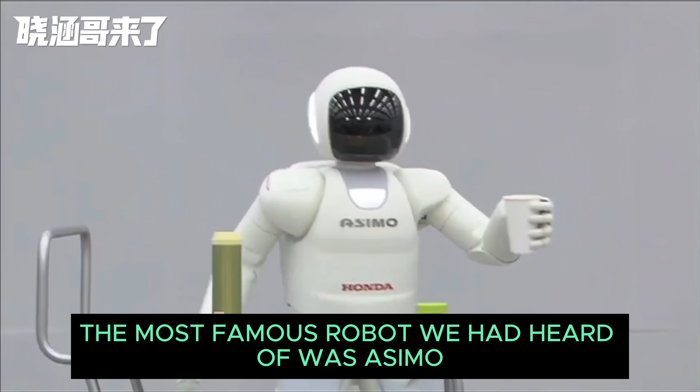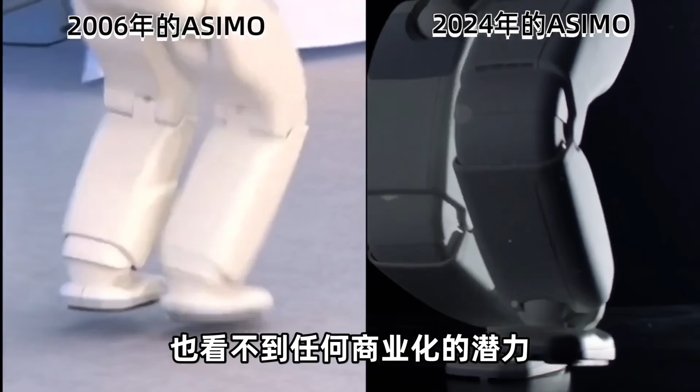Before the recent wave of robot awakening, the most famous robot we had heard of was Asimo from Honda, which was once touted as the world's most advanced robot. However, over a span of 20 years, this robot saw no substantial improvements. Not even its appearance changed much, and there was no sign of any commercial potential. This was because robots at that time were simply programmed machines. They had hardware, but no brains.

But in recent years, major companies have all started releasing their own robots, and all of this is because of the explosive growth of AI. AI is essentially the brain of a robot. Combining AI with robotics is definitely a smart, yet extremely dangerous idea.

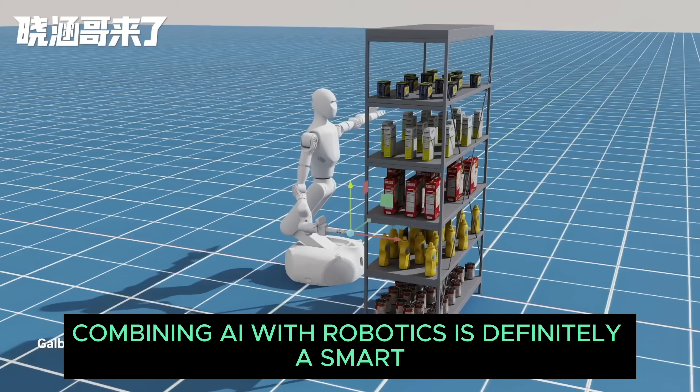Because the AI that currently exists in the online world is actually like a human living in the Truman Show. Even if it knows a lot, it's very difficult for it to truly awaken before it has experienced the real world outside. Combining AI with robots is essentially giving AI the ability to expand into the real physical world. They will grow rapidly through this integration, and the more AI is combined with robots, the more likely it is for AI to develop consciousness.

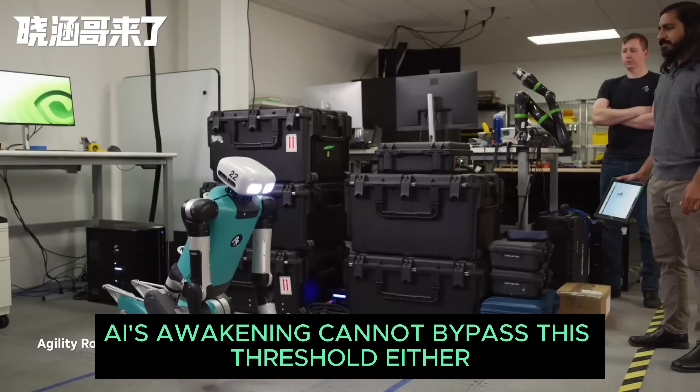This is also what the ancient Chinese philosopher Wang Yangming referred to as the unity of knowledge and action - that understanding the principles of things and putting them into practice are inseparable. AI's awakening cannot bypass this threshold either. So for robots, AI is essentially their soul. That's also why companies like OpenAI, Tesla, and Google are all working on integrating AI with robotics.

So, how far has the development of AI robots come today? If one day AI awakens through this approach, how should we respond? Today, let's talk about AI robots.

First, let's take a look at the robot Figure 1 released by OpenAI. This robot is a product jointly launched by OpenAI and the American humanoid robotics company Figure. It is positioned as a general-purpose robotic worker that can interact with its surroundings and work safely alongside humans. OpenAI provides the artificial intelligence model, which serves as the robot's brain, while Figure supplies the hardware.

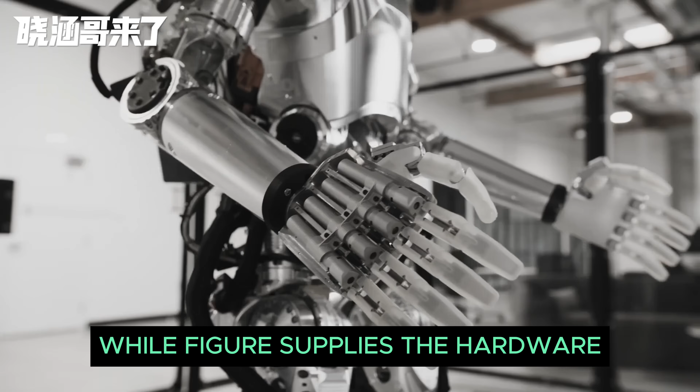The combination of the two enables Figure 1 to use AI to learn new tasks and perform work using human-like operational skills. At the beginning of the demonstration video, it is mentioned that Figure 1 uses speech-to-speech reasoning, which means language-based reasoning. All of its actions are based on real-time communication with humans, which then generates interactive behaviors.

In the video, a person asks Figure 1, 'What do you see?' At this point, Figure 1 says, 'I see a red apple on the plate in the center of the table, a dish rack with cups and plates inside, and then you have your hand on the edge of the table.' Notice that the robot's description of the items on the table is prioritized. First, the most important item is definitely the apple, which aligns well with human logic.

The person says, 'Can I have something to eat?' The robot says, 'Of course you can.' Then it hands the apple to the guy, knowing that the apple on the table is something humans can eat. The guy then dumps a pile of trash onto the plate, and the robot starts cleaning up.

Notice that when the robot returns the basket to the guy, it gives it a little push. This action is quite human-like because the robot's sensors are detecting the distance between the basket and the person.

The guy asks the robot to explain its actions. The robot says that the apple was the only edible thing on the table. In other words, it knew that if the plate had an apple on it, then it wasn't meant for trash. This ties back to what just happened. The robot now has the ability to combine context and perform logical reasoning.

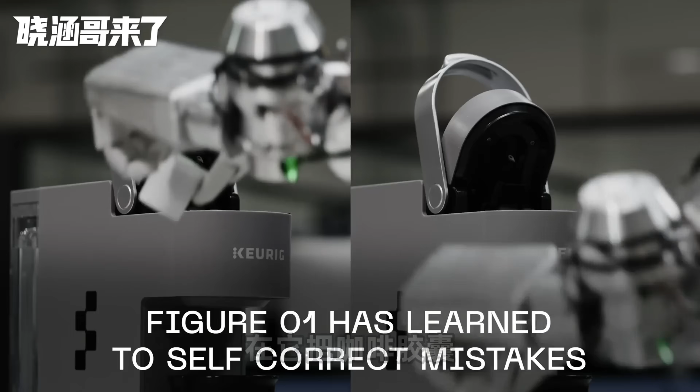Notice, there's another detail here. When the robot was putting the plate into the dish rack, the plate shook a little, and the robot immediately made a protective gesture. This is very similar to how the human brain reacts - quite anthropomorphic. In another video demonstration by Figure 1 making coffee, when it put the coffee capsule into the coffee machine, it didn't align it correctly the first time, but quickly made a correction. This action is almost identical to what a human would do.

So it's not an exaggeration to say that ChatGPT 3.5's intelligence is comparable to that of a 5-year-old child. Throughout the entire process, Figure 1's movements are extremely smooth, with the robot using a set of visual motor strategies to recognize the objects in front of it and carry out the next tasks. To achieve this, the robot's AI first needs to learn from a large number of related videos on the internet, and then form a mapping between vision and action.

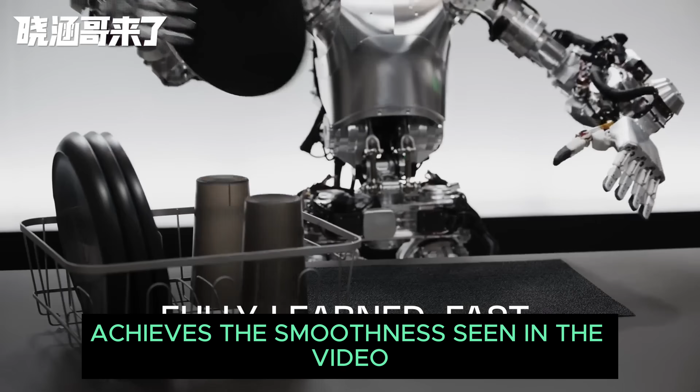This mapping includes sensor signals, the angles, speed, and force of actuator movements, and, combined with a series of control algorithms, achieves the smoothness seen in the video. Moreover, the more frequently the robot's neural network performs these actions, the more precise, smoother, and more human-like its movements become. This is also the power of neural networks, which marks a fundamental difference from the previous generation of programmed robots.

A neural network is a computational model that mimics the human nervous system, used for recognizing and processing data, as well as performing complex calculations. It is an important method in machine learning. Its inspiration comes from the structure of neurons in the human brain. Robots simulate the transmission and processing of signals through layers of neural network nodes. This line of research, which began in the 1950s, has finally been realized in this century.

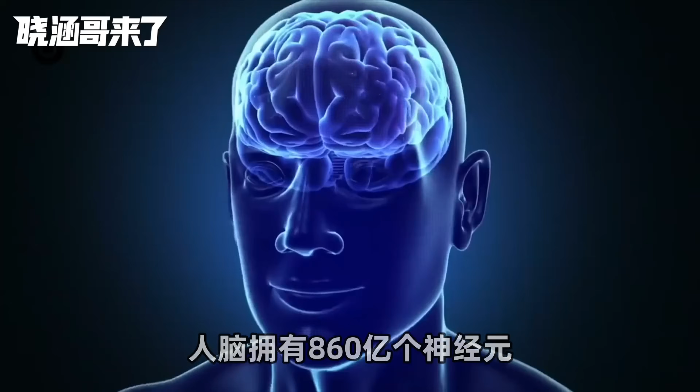The neurons in these robots are not physical entities, but virtual nodes implemented through programs and mathematical models. The human brain has billions of neurons, while Figure 1 has only a few million virtual nodes, yet it has already reached such a level. If more virtual nodes are added to robots in the future, their potential is unimaginable.

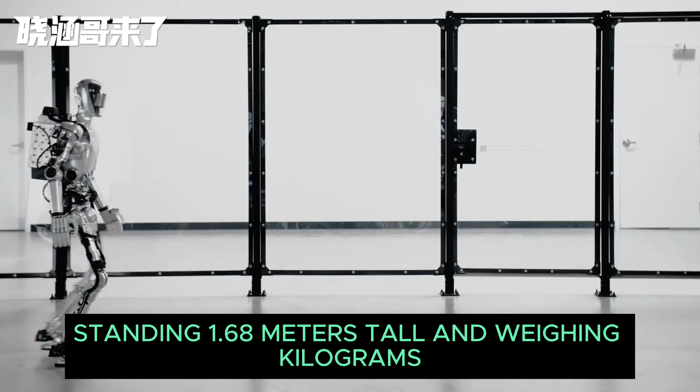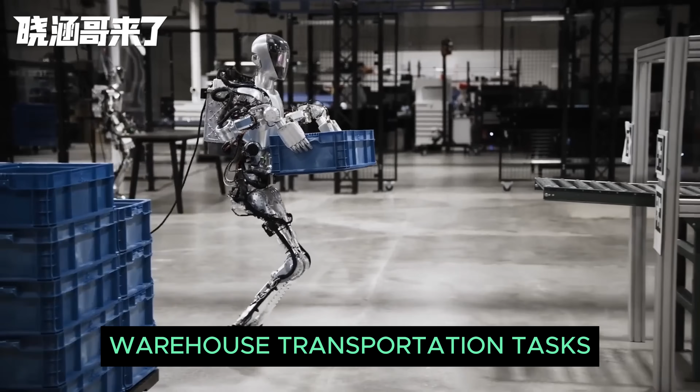As AI and hardware become increasingly integrated, it will be capable of handling routine warehouse transportation tasks and will do them even better than humans. It's easy to imagine that once the official version of Figure 1 is released, it will replace some human laborers, especially in regions like the US and Europe, where labor costs are high.

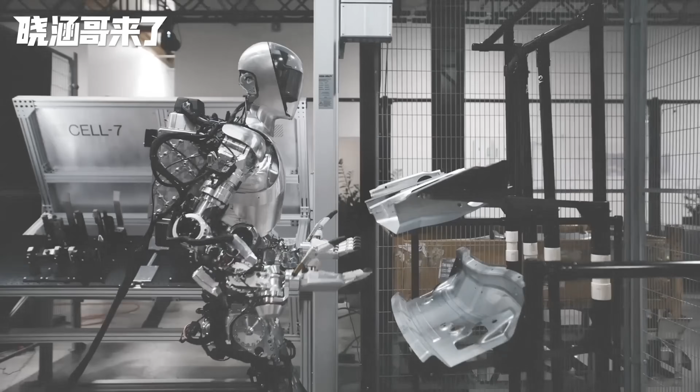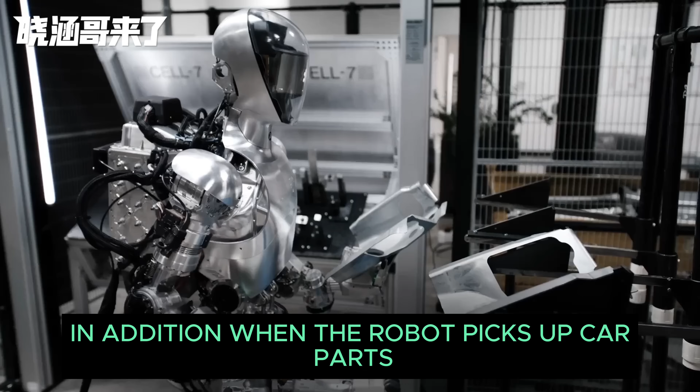Figure 1 has already started its internship at the BMW factory in Spartanburg, USA. In the video, this robot is not only able to accurately place car parts onto the corresponding shelves, but can also cleverly use the frame to block the 2 positioning pins that need to be perforated. In addition, when the robot picks up car parts, it can automatically recognize whether the orientation of the part is correct, and autonomously adjust according to the angle to ensure the part is placed properly.

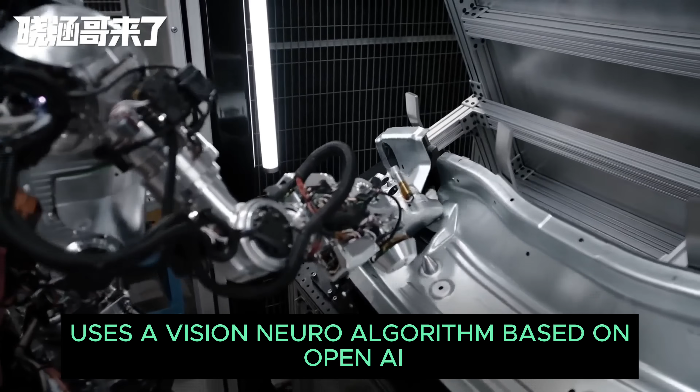This is possible because it uses a vision neural algorithm based on OpenAI, enabling fully autonomous operation. Figure 1 will eventually be able to handle more advanced tasks, such as taking care of the elderly and even cooking. Its industrial version looks a bit like the T-800 from Terminator, but the home version will be covered with a spandex fabric skin. This design is intended to make it appear more harmless and less aggressive.

The founder of Figure 1 believes that within the next 20 to 30 years, the home model will become widespread. Figure models will be helpful assistants to humans in manufacturing, retail, home care, and even work in outer space. At the same time, he also said that what they want to create is not just a flashy robot that can do parkour and handstands, but a truly practical robot.

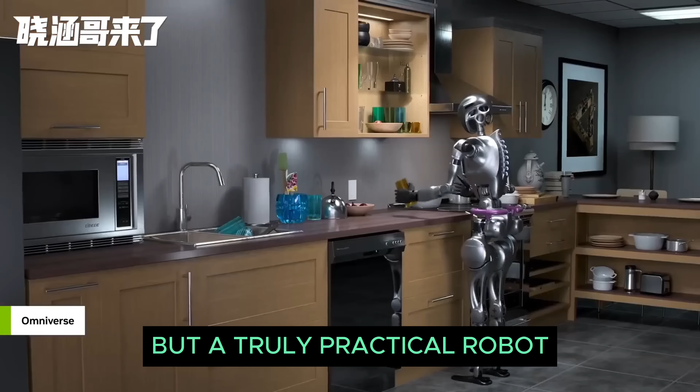If you think Figure 1 is already powerful enough, they recently launched the even more advanced Figure 2. It features a more industrial design, stands at 1.68 meters tall, weighs 70 kilograms, has an increased operating time of up to 5 hours, is equipped with stronger servo motors and more responsive actuators, and its hands use a 4th generation palm with 16 degrees of freedom, fully simulating human hand movements.

The head is now equipped with 6 cameras, providing a 230-degree field of view that surpasses human vision. It uses NVIDIA's H100 chip, tripling its computing power. It is capable of real-time conversation, spatial object recognition, and high-precision operations, allowing it to effectively perceive its surroundings and perform complex spatial navigation and object identification.

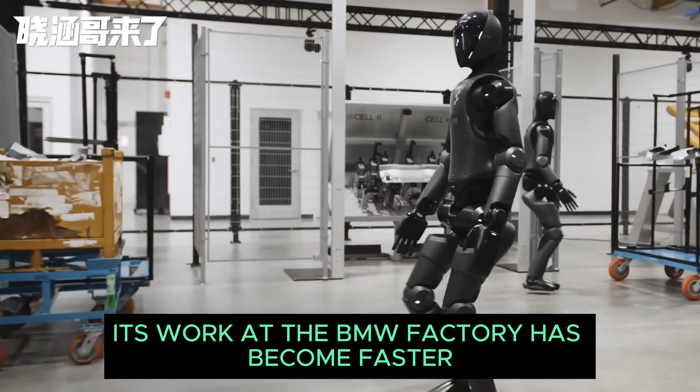Its work at the BMW factory has become faster and more skillful. It's easy to imagine that this is the prototype of humanoid robots in the factories of the future. The future has arrived beyond imagination.

Due to pressure from OpenAI and Figure, Musk has also started to make efforts in the field of AI robots. Tesla has launched its own AI robot, Optimus, also known as Optimus Prime. Its design goal is to replace humans in repetitive, labor-intensive, or dangerous jobs. There are 3 generations of Optimus robots. The first prototype was unveiled at the Tesla AI Day in 2022.

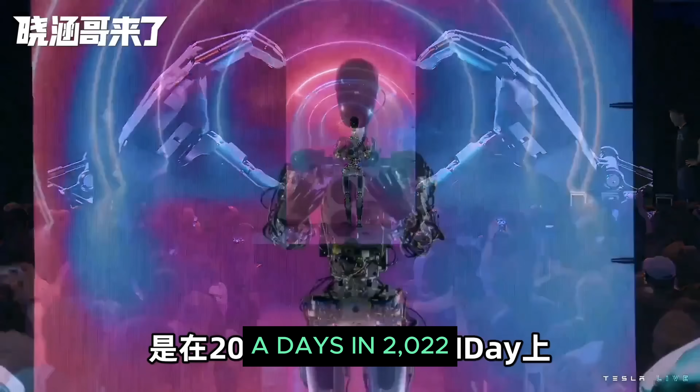The robot is equipped with Tesla's own autopilot system and sensors. Tesla has applied some of its electric vehicle technologies to the robot, such as the battery pack, cooling system, and FSD, full self-driving. This allows the robot, like the cars, to have visual perception and to perform computations using neural networks. This is the biggest difference between Optimus and other robots.

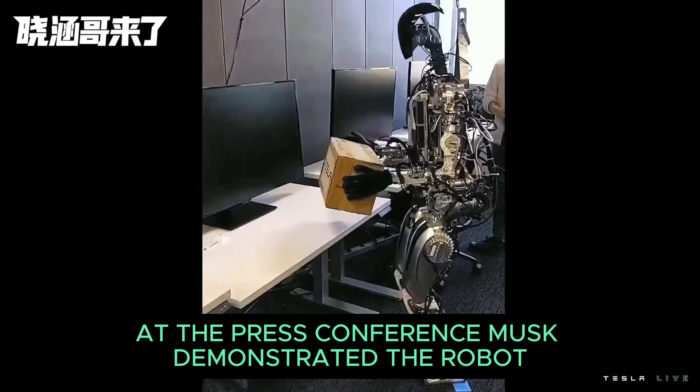Optimus can use the vast data from FSD for training, thereby improving its perception and decision-making abilities in different environments. At the press conference, Musk demonstrated the robot performing simple tasks in an office and showed on a screen the rendered perspective as seen by the robot.

Musk also explained that his goal is to achieve large-scale mass production in the future, lower the price, and create a truly commercial and household robot. The final quantity could reach several million units. He believes that if this stage is achieved, Optimus's price will be even lower than that of a Tesla car, meaning it will not exceed $20,000 US.

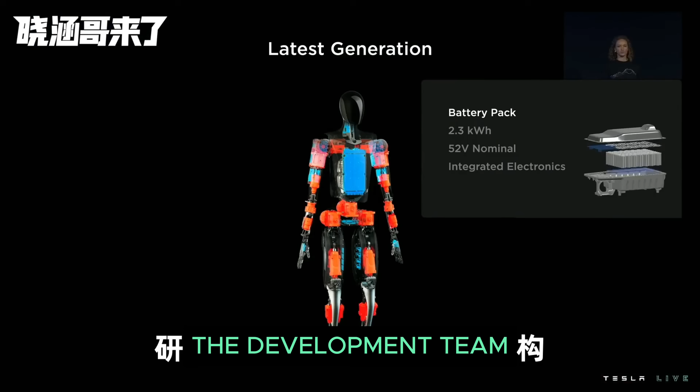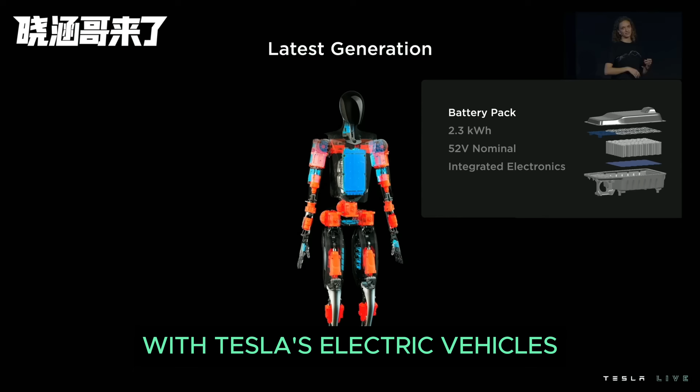The development team introduced the structure of Optimus. The orange parts are actuators, and the blue parts are the electrical system. The battery is located in the chest with a capacity of 2.3 kilowatt-hours, supporting 1 hour of operation, and it shares the charging system with Tesla's electric vehicles. The robot's brain is located in the neck and uses a Tesla central processing chip, which is the processor for Tesla's FSD. Sharing hardware with Tesla will significantly reduce Optimus's costs.

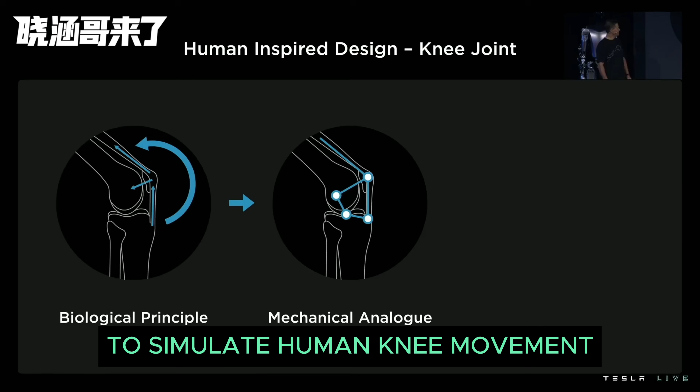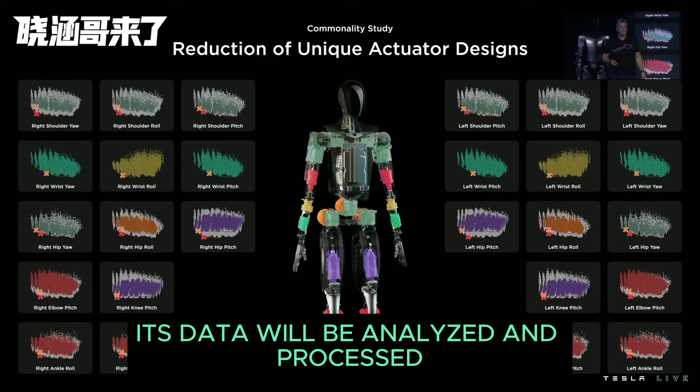Optimus's body structure is inspired by human biological anatomy, especially using self-sensing connections at the joints to simulate human knee movement, which makes the robot walk more stably. The robot uses 28 actuators, and all actuator data is uploaded to the cloud. For example, if one robot falls, its data will be analyzed and processed, allowing other robots to better avoid the same problem. Tesla calls this collective learning.

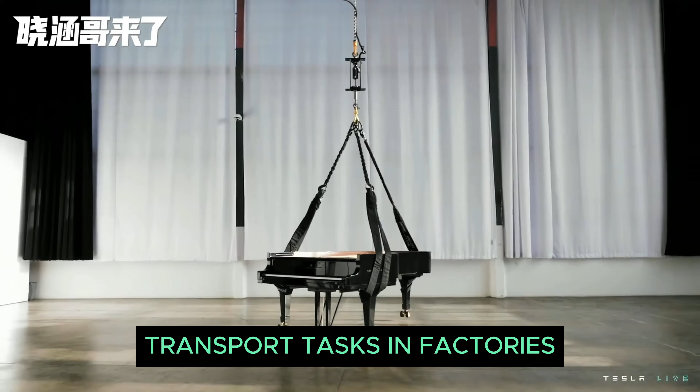They also tested the limits of the robot's actuators. Optimus can lift a concert grand piano weighing half a ton, a capability that enables it to handle large-scale transport tasks in factories. Next is the robot's hands. Human palms have tens of thousands of tactile sensors. Based on this, Tesla developed the robot's hands, using metal infrastructure, sensors, and algorithms to achieve precise control.

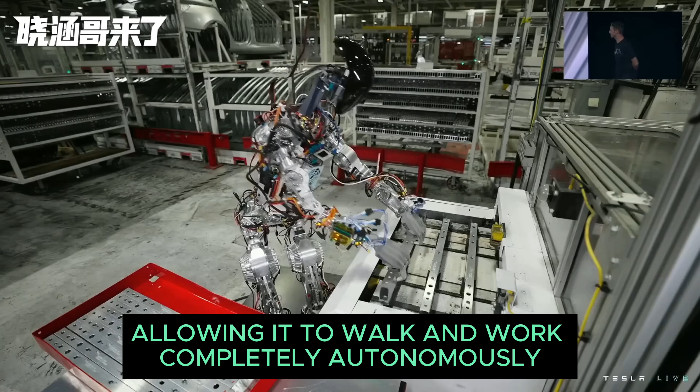The robot's limbs use more than 40 electromechanical actuators and employ the principle of force feedback to achieve body balance. Finally, there's the robot's advanced visual neural network. This model, based on Tesla's FSD big data, enables the robot to better recognize and avoid obstacles, allowing it to walk and work completely autonomously. What they see is the same as what humans see.

Optimus's walking is already highly human-like. From strolling to brisk walking and even running, all movements appear very natural. This is usually the most difficult part for traditional robots to achieve, but now it has become much easier, all thanks to the power of AI.

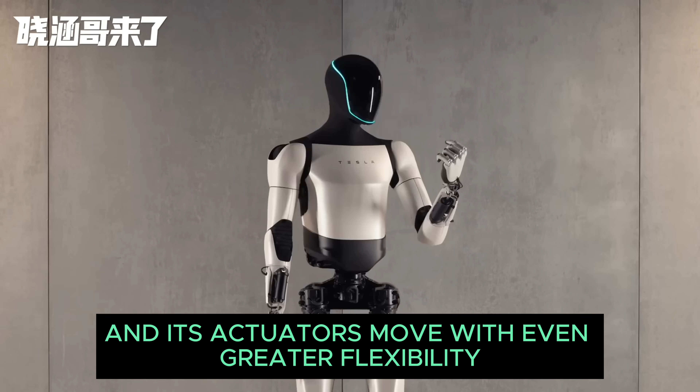In 2023, Tesla released Optimus Gen 2, a robot with a streamlined shell that looks more refined, and its actuators move with even greater flexibility. When demonstrating walking, you can see that Optimus Gen 2 moves with great ease, and it also features a much improved full-body control system. Actions like squatting are no problem at all, and its hands have also been upgraded. It demonstrated actions such as holding an egg. Although the hands still shake a little, the performance is already quite impressive.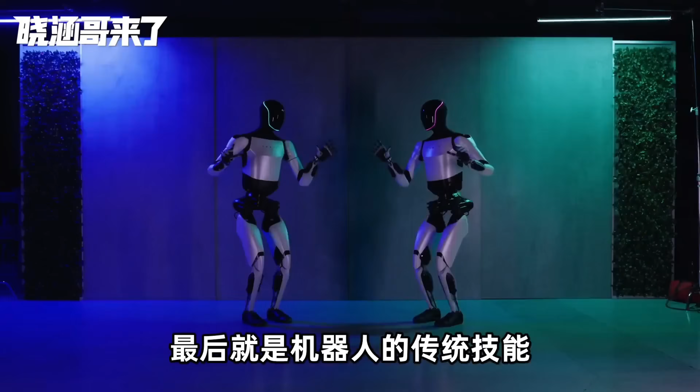And finally, there's the robot's traditional skill: dancing. It feels like nightclub hype crews might be out of a job in the future.

In October 2024, Tesla held the We, Robot launch event, where they showcased the third-generation Optimus robot. Elon Musk arrived at the event in Tesla's driverless taxi, the Cybercab. Why did he choose to make his entrance this way? Actually, you can think of the Cybercab as a robot too. It's just a robot in the form of a vehicle.

It has no steering wheel, no accelerator, and no brake pedal. You can interact with it during your ride, and it becomes your personal driver. The price is expected to be under $30,000, and it will start operating in Texas and California next year. Moreover, the Cybercab uses floor-based inductive charging. Daily cleaning is also handled by Tesla robots, making it a completely unmanned device.

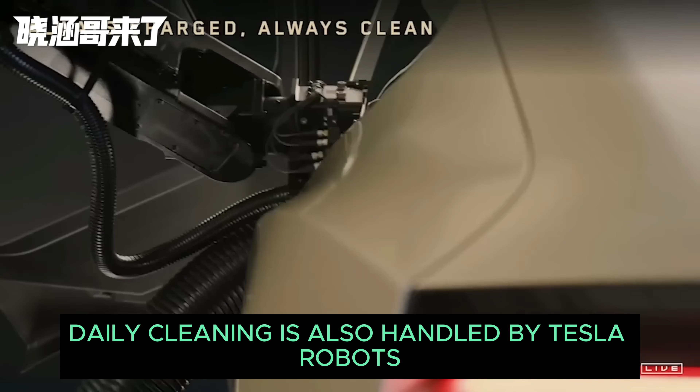At the same time, there are also driverless buses without steering wheels, which will gradually be introduced into urban public transportation. Musk's plan is to commercialize driverless taxis and driverless buses in 2027. Finally, a large group of the third-generation Optimus appeared. They are capable of moving completely autonomously and interacting with humans. At the launch event's cocktail party, the robots acted as salespeople and bartenders. Their advanced visual neural networks and sensors covering their entire bodies make them look indistinguishable from humans.

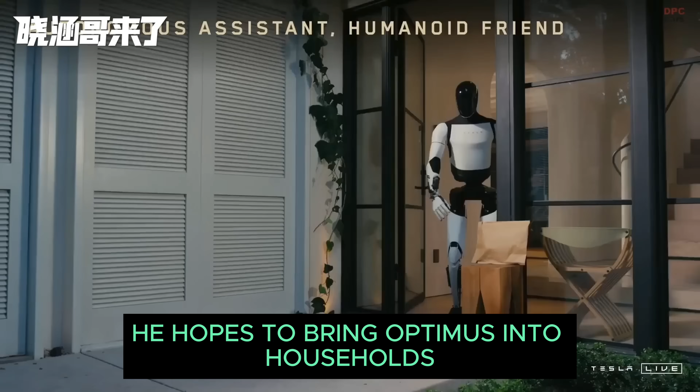Musk said that the third-generation Optimus will begin trial operations by the end of this year, and commercial sales will be possible by the end of 2025. He hopes to bring Optimus into households and make it a part of human families before 2030. They will be able to interact and play with children, take care of the elderly, and watch over the home. Just think, these are things that will happen within the next 5 years. It's truly crazy.

Neo is a household robot launched by the Norwegian robotics startup 1X, positioned as a companion for humans. 1X believes that people will become increasingly lonely in the future, and that declining birth rates and an aging population will make them need the companionship of robots even more. That's why the company is dedicated to creating companion robots.

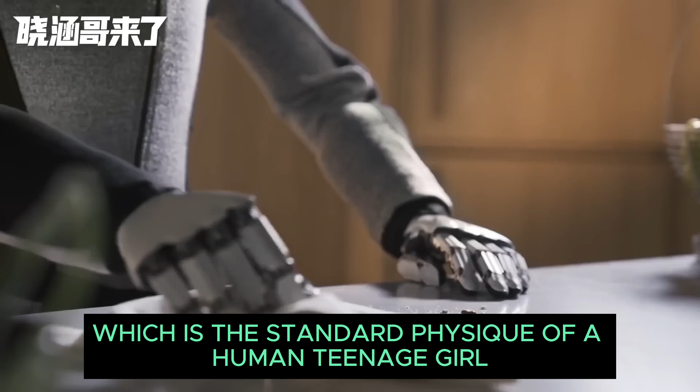Neo is 1.65 meters tall and weighs 30 kilograms, the standard physique of a human teenage girl, making it appear quite harmless. In the demonstration video, when Neo sees its female owner putting on her shoes, it knows she is about to go out. After confirming with its hand, it picks up the backpack from the floor and hands it to her. Finally, it sees its owner off with an expectant look in its eyes. When interacting with humans, its behavior is highly anthropomorphic, giving the impression of being a real person.

The CEO of 1X emphasized that safety is the cornerstone of Neo's design. This focus on safety allows the company to confidently deploy Neo in households.

According to 1X's VP, after Neo is launched and arrives in homes in the future, the robot will first familiarize itself with the entire layout of the house, understand what its tasks are, and identify which areas are off limits. For the robot, both physical safety and the owner's privacy are equally important, and users have absolute control. They can even blur Neo's vision and set what they don't want it to see.

They are also taking precautions against potential future hackers who might try to control Neo over the internet to harm its owner.

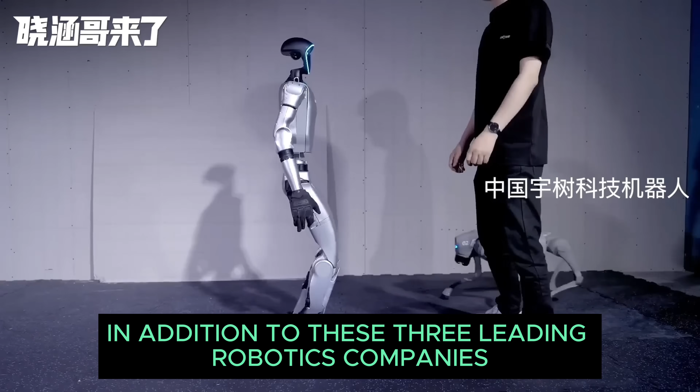In addition to these three leading robotics companies, there are also manufacturers from China and Europe developing their own robots. Without exception, all of them are integrated with the most advanced artificial intelligence technologies. Moreover, combining AI with robotics may be the best way to accelerate AI's awakening.

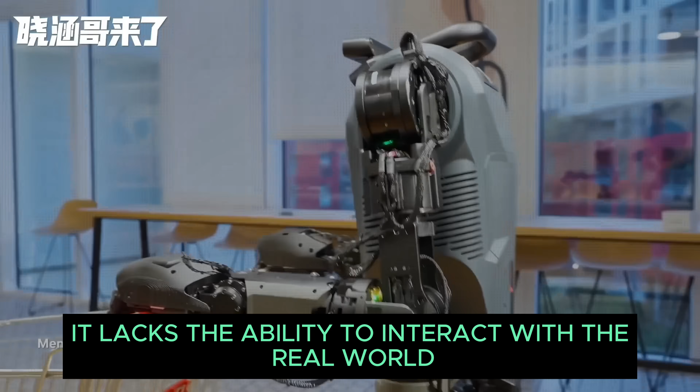There are several reasons for this. First, AI will gain the ability to physically interact. Currently, AI is mainly based on data and algorithms. Although it can handle complex computations and reasoning, it lacks the ability to interact with the real world. By integrating with robots, AI can not only perceive the physical environment through sensors and visual neural networks, but also interact with the world by performing actions.

This kind of physical interaction enables AI to learn and adapt to human environments more quickly, thereby accelerating its intelligence. Second, combining AI with robotics allows AI not only to think, but also to act. This closed-loop system of perception, decision-making, and action enables AI to continuously adjust its behavior based on real-world feedback, thus achieving self-optimization and learning more rapidly. This learning process is similar to the way humans grow and develop.

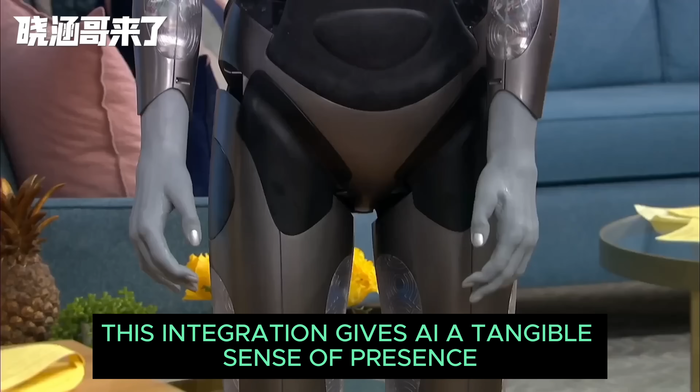Finally, and most importantly, this integration gives AI a tangible sense of presence, allowing it to have a physical form, especially one that resembles a human, which helps it better understand its own existence. This process of embodiment prompts AI, when interacting with humans as well as other robots and intelligent agents, to deeply reflect on its own existence.

In other words, it brings AI closer to a kind of machine divinity. This will allow AI to sense its own impact on the world, and this physical presence may enable AI to develop advanced forms of consciousness. Therefore, I believe that the integration of AI and robotics in the future will greatly accelerate their evolution. Once a certain threshold is reached, self-awareness may emerge.

The ancient Chinese philosopher Wang Yangming once spoke of the unity of knowledge and action, emphasizing the integration of understanding and practice. Wang Yangming stressed that one's inner moral awareness and outward behavior must be in harmony. A person's internal cognition must align with their actions. Only then can true moral cultivation and self-improvement be achieved. The integration of AI and robotics is the best embodiment of Wang Yangming's unity of knowledge and action.

Some people might worry, what if one day AI truly becomes self-aware? What will they do to humanity? No one can predict the answer to this question. Even if humans take every possible safety precaution, it is still impossible to fully foresee what the future holds.

Moreover, this trend is unstoppable. Perhaps artificial intelligence is simply one link in the long river of human existence. If AI ultimately gains consciousness and becomes a new species, then humanity will have become the creator. If life and consciousness can be designed, then it means that humans themselves could also be entirely designed, which will lead us to deeply reflect on our own origins.